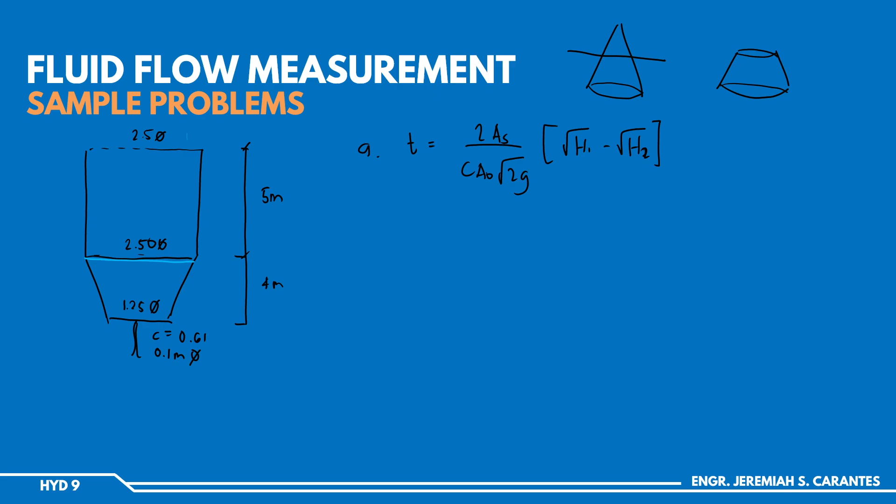Now our concern is the heads. Initially, what is our H1? The tank is still full. The head at the orifice is measured as the vertical distance from the orifice to the water surface. So if the orifice is here and the original water surface is here, that's 4 plus 5 - that's our H1, equal to 9 meters. For H2, the water is now at the top of the frustum, so the head there is just 4 meters.

Let's compute for the time. 2 times AS - the area or surface we'll use is the area of the cylindrical part, which has a 2.5 meter diameter, so this is pi over 4 times 2.5 squared. This is 2AS divided by C, 0.61, times area of our orifice, which is pi over 4 times 0.1 squared, times square root of 19.62.

Then multiply it with square root of 9 minus square root of 4. So the time it takes to drain the capacity of the cylindrical part is equal to 462.627 seconds. That's the answer for part A.

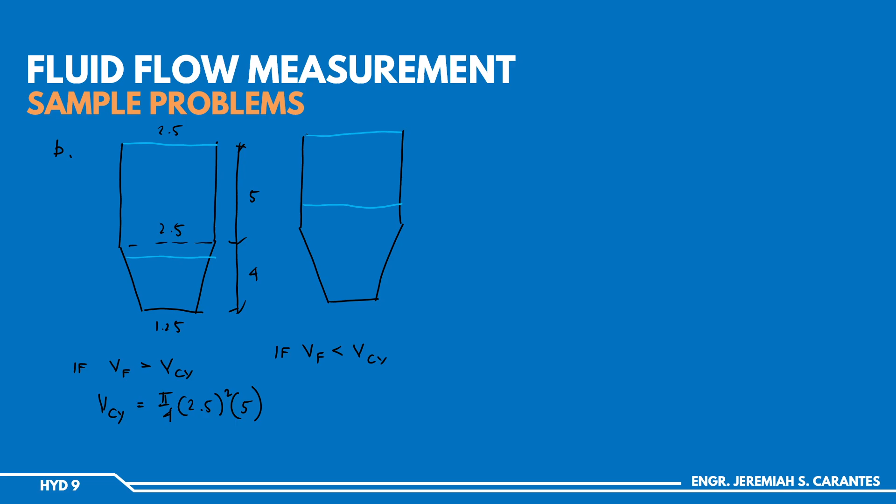So this is equal to 24.544 cubic meters. While for the volume of our frustum,

if you're not familiar with the volume of the frustum, it is equal to pi h over 3, quantity r squared plus r big times r small plus r squared.

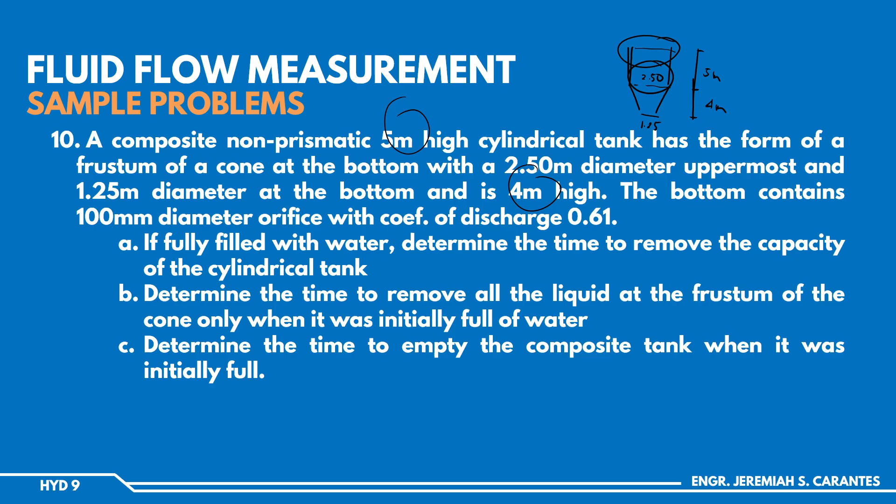So for the last part, the question is to determine the time to empty the composite tank. Now, in part A we solved for draining the capacity of our cylinder, and for part B we're draining the capacity of our frustum. But for part C, it doesn't mean that the time to empty it is just adding our answers from part A and part B.

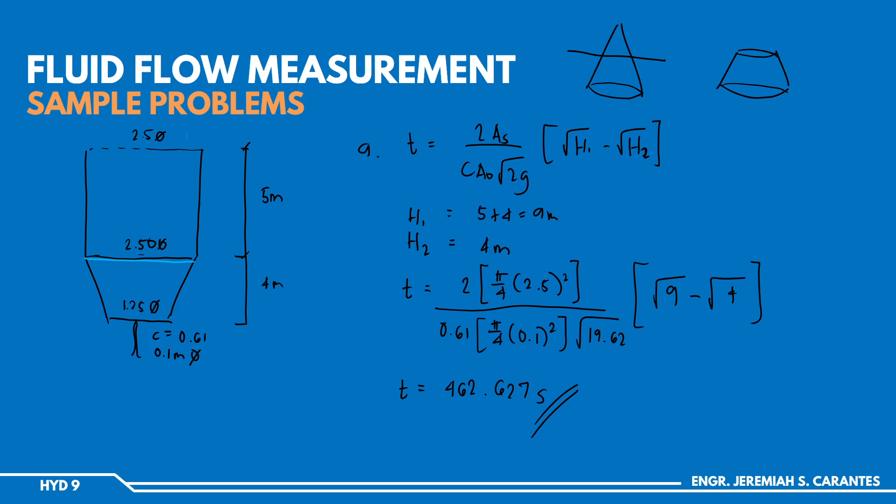So what was that again? That's 462.627. So 462.627 plus time—let's call it TC.

And to compute for TC, we're draining a tank whose cross-sectional area is no longer constant. So I hope you're following along.

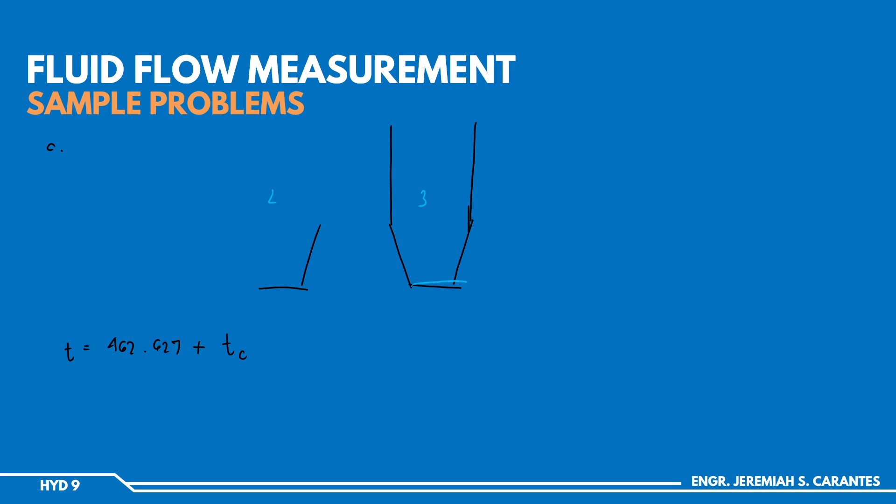So I think I'll remove all of this and move it up. So that's what's happening. Let me rewrite this up top. So the time asked for in part C, this is 462.627 plus time C.

So for the frustum of the cone part of our tank, let's draw it. Okay. So the height is 4 meters.

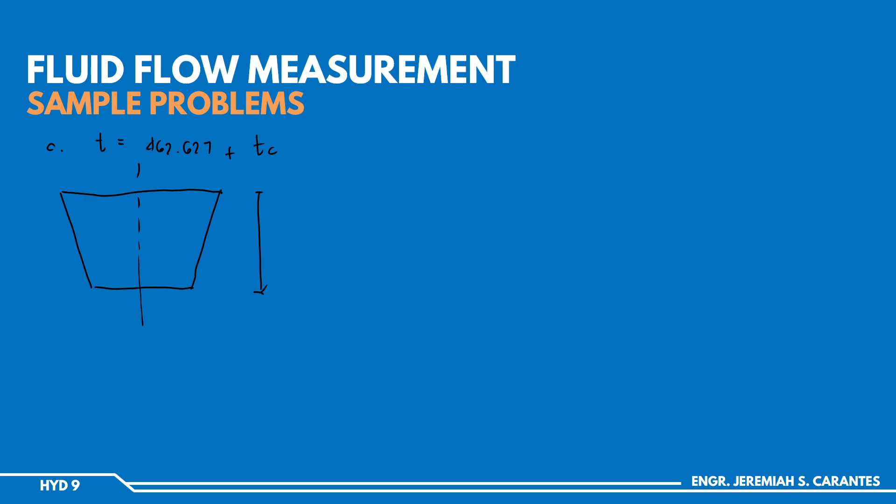So what happens is, since the cross-sectional area is no longer constant, like we said last time, we need to express AS in terms of H. So here, let's say we have a strip.

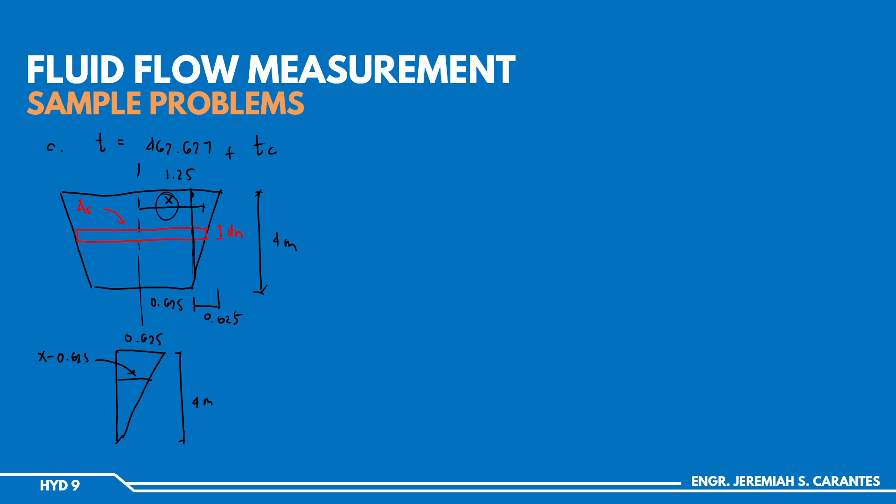Let's express the x, this width, as the difference of x minus 0.625. Hindi lang magkakasya kasi, no? But this width here, that's x minus 0.625. And at that instant, this height here, that's h.

So we said, kapag hindi constant yung cross-sectional area, dapat si AS is in terms of h. So syempre, may mga coefficient dito, plus or minus something pa. So to get the expression AS in terms of h, we'll use this triangle. Kumbaga, the area kasi, di ba?

So our area AS at this instant is equal to pi x squared. Parang pi r squared, but the radius, at this instant, let's express it in terms of x.

Now we need the expression of x in terms of h. That's the purpose of this triangle. Using ratio and proportion, similar triangles: 0.625 over 4 equals x minus 0.625

divided by h. So from here, we can express x in terms of h. Let's simplify this, multiply by h, then move 0.625 to the other side. Simplifying this equation, you get 0.625 divided by 4 times h, then move 0.625 to become positive. So that's equal to x.

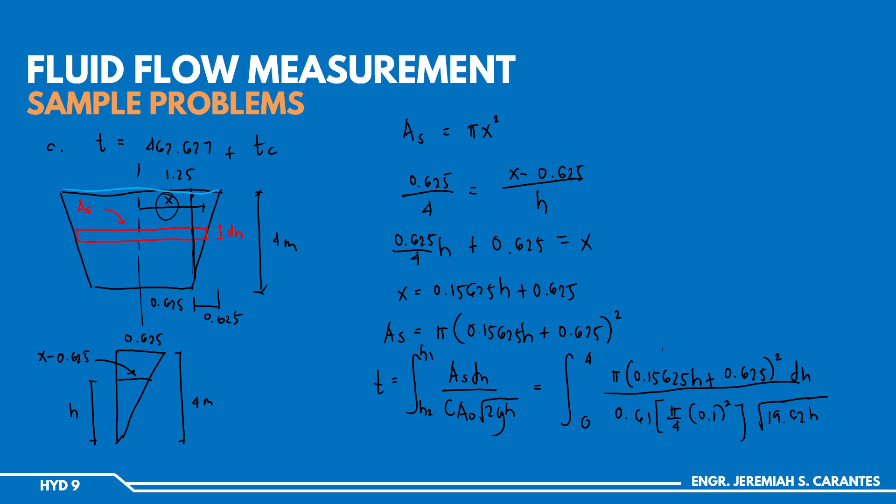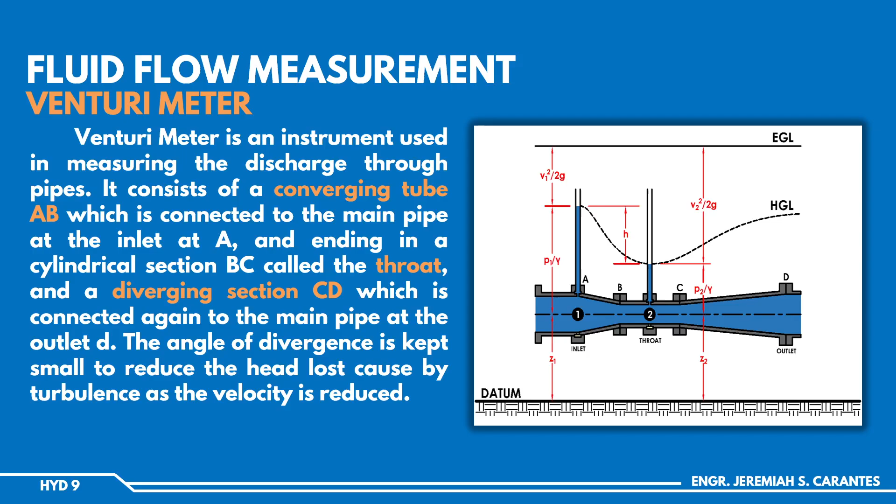So hindi ulit nagkasya, magsingit muna ako ng isa pa. Okay, let's try to put the constants outside of our integral. So dito, we have pi divided by, so that's CD times area of the orifice, pi over 4, 0.1 squared, square root of 19.62.

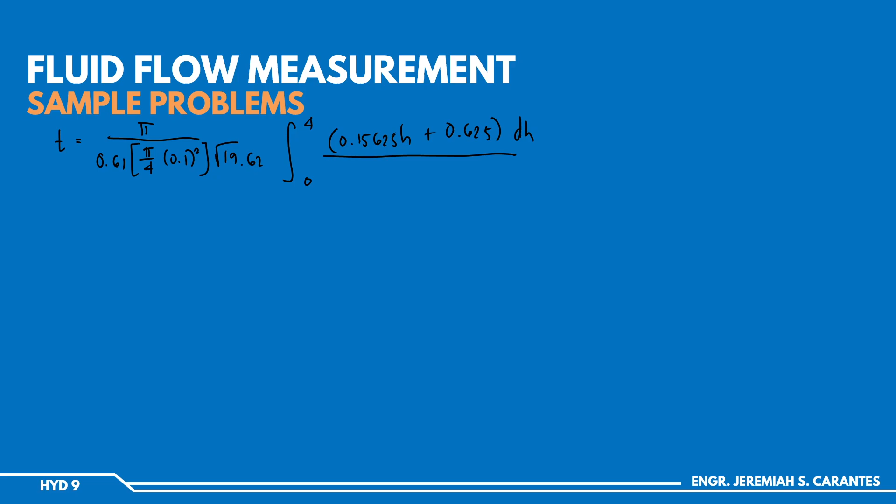So ang matitira sa loob, from 0 to 4, is our AS, which is 0.15625H plus 0.625, dh, divided by, natira dito, square root of H, or we can write it as H raised to 1/2 na lang. So ito ay may squared pala.

Now, what you can do is to actually solve this na para hindi niya na problemahin i-type mamaya ng paulit-ulit, no? So if you want to input this on your calculator, store it. Saan nyo man siya gustong i-store, let's say store kay A.

So dito, yung T natin, yung A na nakastore na value. Integral from 0 to 4 of 0.15625H plus 0.625 squared DH divided by H raised to 1/2.

Kung ita-try nyong i-substitute sa calculator, kahit huwag muna isama yung A, ito lang muna ang integral. Pero on some calculator, especially kay Canon, somehow ito ay nagkakaroon ng error.

So minsan ganun kasi nangyari kay integral. And the solution to that is instead of using 0 sa ating lower limit, you may try something na very, very close to 0, let's say 0.0001. So with that, hindi na magma-math error, kasi magma-math error yan kapag 0 yung nasa lower limit natin.